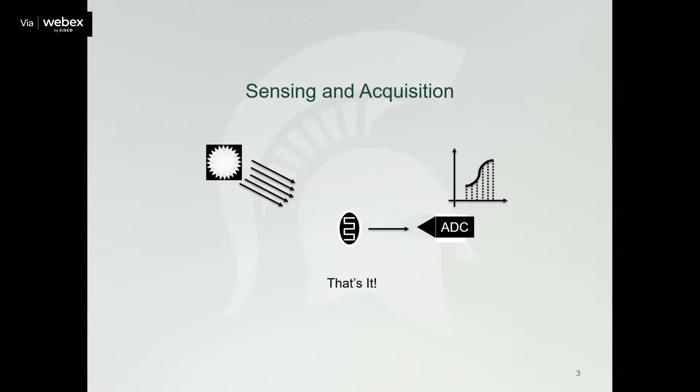This is what we do when we talk about sensing: you have some kind of signal in the form of energy, and you just want to read it. So one simple way of doing it is just using ADC, and you can get the signals. There are a lot of things that can be sensed. Let's expand our problems or the applications. There are so many things out there, for example, gas, smoke, permittivity, radiation, stress, light, pressure, and so on.

So when we talk about sensing problems, and if we want to limit this to NDE, there are a lot of things that can be captured using sensors. And this is a truly multidisciplinary area. We can do the data acquisition using ADC for each of them.

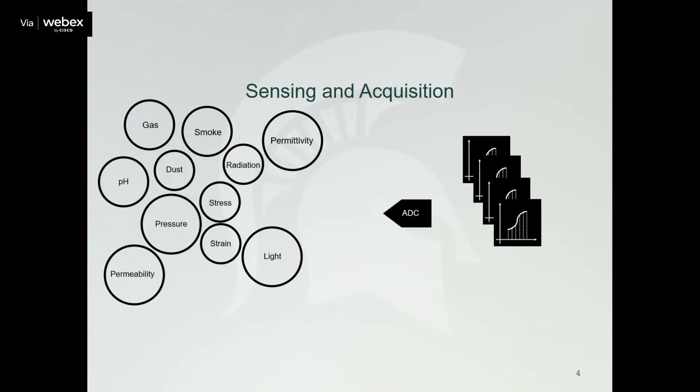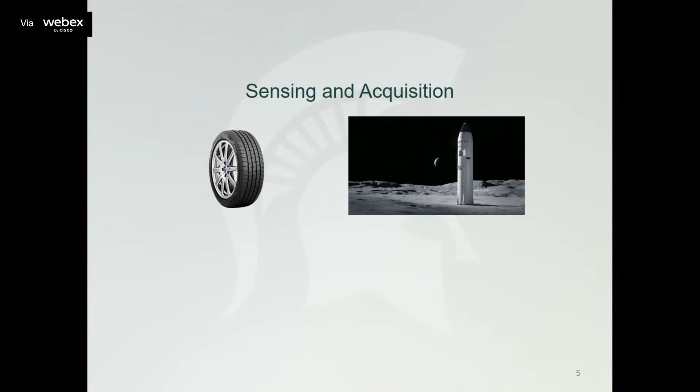So let's look at an example here. Two different applications, right? One is a tire, the second is a spaceship. So what is common between a car tire and a spaceship? Both are pressurized, right? So how can I use a sensor to measure the pressure information? But of course, you have to deal with different conditions when you are doing the pressure measurement for a car tire and a spaceship.

You'll see so many applications for sensing and acquisition out there in the sectors of energy, agriculture, defense, transportation, and so on. In day 3 of this course, with the examples we had in the previous 2 days, hopefully we'll have a rough idea of what applications we can apply our knowledge to after we learn these concepts. And in day 4 and day 5, you'll see examples in agriculture and in energy. Of course, we've talked about examples in defense and transportation.

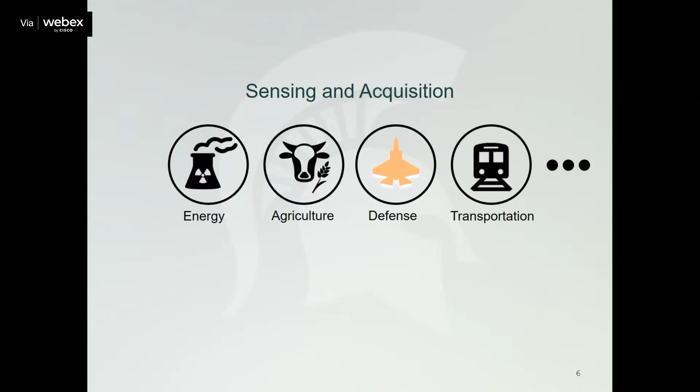So new sensors and acquisition methods are needed for different applications, and I believe I convinced you through the solution approach flowchart when we talked about the impacts of NDE and SHM. And new applications are coming every day.

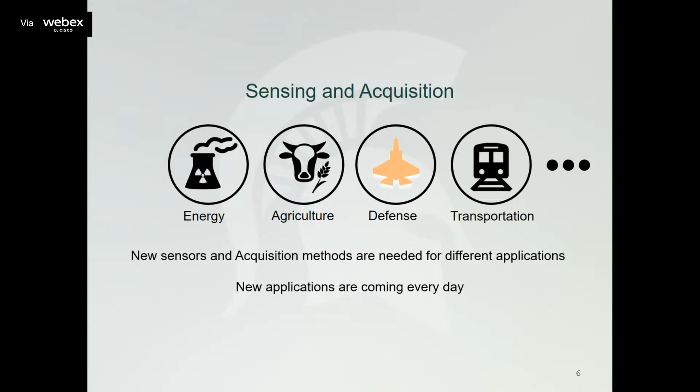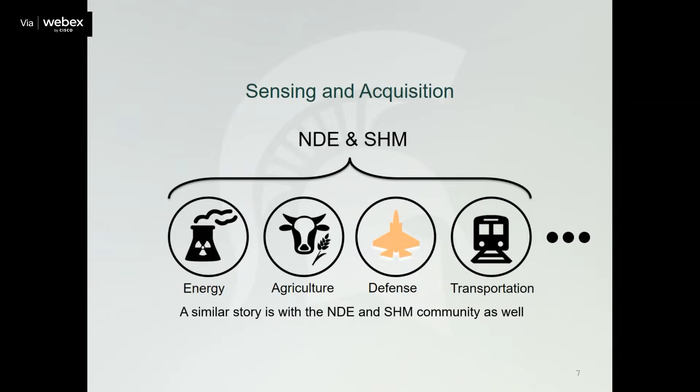Well, I mentioned the differences and the things in common for NDE and SHM, but if you look at it in terms of the sensing acquisition, then you see both concepts or both techniques will apply or fall well into this domain. And you'll see a similar story with the NDE and SHM community as well, although you usually will divide them into two closely related but different communities out there.

In terms of applications, I would like to list three different materials that we're dealing with on a daily basis when we're doing NDE and SHM. But before that, let's have a quick review on the common points and differences for NDE and SHM. I used an analogy at the time, let's say similar to medical devices.

NDE is how we can use those large capital and more expensive localized measurement techniques in hospital, for example, X-ray, CT, MRI, PET, and so on, to give you the exact nature of your disease or what's going on in your human body, versus monitoring techniques, which are usually global, low cost.

And if you look at the way you can collect the data on a much, much larger population, sometimes you call that distributed monitoring or sensing. For example, you can have those handheld, wristband type of devices to monitor your blood pressure, cholesterol level, heartbeat rate, and so on. Well, for industrial applications, for engineering applications, this is very similar.

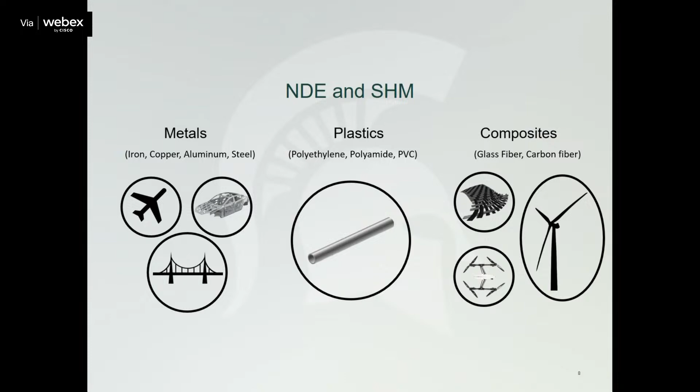And for composites, we've seen the motivation of using composites in the aviation industry. Today, we'll talk about composites used in the automobile industry, and many more areas are using or adopting those lightweight materials. Just to give you a very quick view, and I am sure you will appreciate the numerous applications of those different materials, as I just listed quite a few of them here.

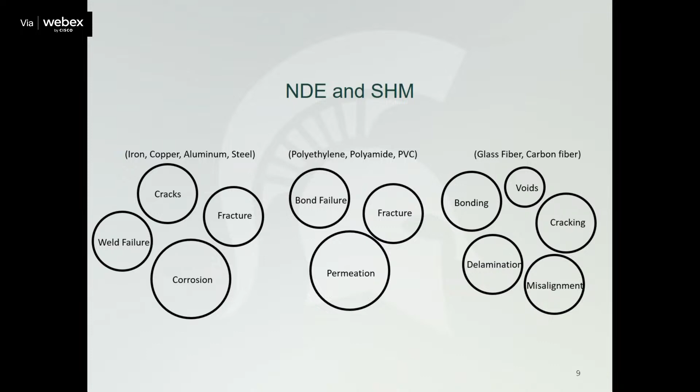Well, for different materials, you can see that I'm interested in different problems. For example, for metals, I am interested in cracking, corrosion, fracture, and for example, the welding between metals and dissimilar metals, and how I can evaluate the failure there.

Well, for plastics, there's a bond failure problem where you fuse plastics together, and there was an interesting project we did for the gas pipeline industry to evaluate the bonding quality of polyethylene.

I don't know if I have time in this lecture to cover that. If I do, I'll be very happy to cover that in our following lectures. If not, I can direct you to some of the readings, although some publications have not been out yet. But this is an interesting problem.

People are realizing that the failure of the plastic joint is not mainly due to the volumetric defects, which are easily detected, for example, using phased array, but you'll see those bonding failures of plastics. Some of them are very difficult to detect using sensing, but it's out there. We call it the cold fusion problem.

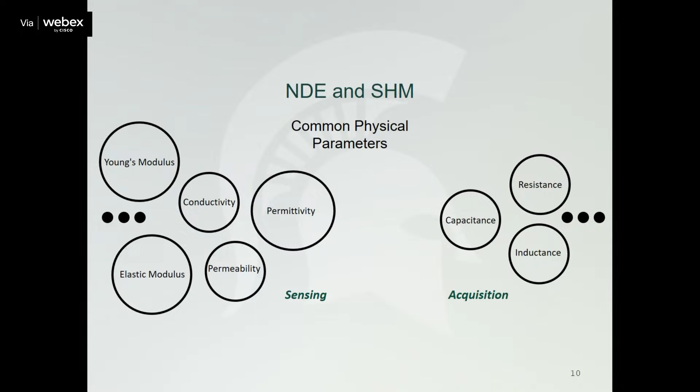Well, when we move this into field operation, sometimes issues will come, and there are still technical gaps. As I pointed out in today's lab session, when I have some technologies, for example, the new EM sensors we developed for CFRP plus steel structures, and we move that into the field, we deal with a lot of uncertainties in the field measurement. So keep that in mind. There are a lot of technical gaps out there, even for those well understood in physics and amazing technologies for NDE problems.

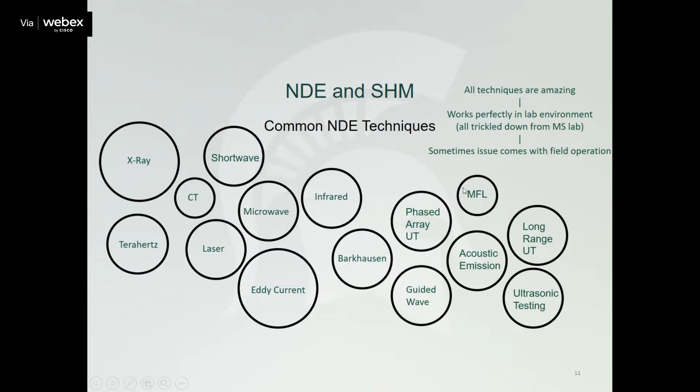So if we want to combine NDE and SHM, we have to fill that gap, because NDE, traditionally, you can work in a lab environment, a factory setting, or a maintenance site setting, in a well-controlled environment. But for SHM, you are doing the same sensing, the same data acquisition, but you have to deal with the field condition. Just imagine those wind farms or those large wind turbine blades out there, rotating 24/7.

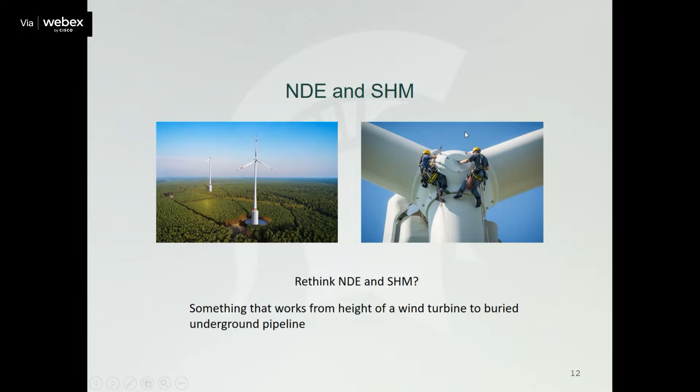Yesterday I talked about this as one arm or one branch to make the next generation of NDE and SHM possible. And for self-diagnosis, we are trying to make it smart in the sensing and data acquisition. So we can achieve, for example, the following scenarios: no wind turbine stop for maintenance check. Is that possible? No excavation for pipeline check, so you don't have to dig things out to do the in-ditch NDE, but you can let the pipe do its job while still checking the condition of the pipe.

No hangar visit for basic routine check of an airplane, so you can let the airplane perform its service. So you can have the in-flight monitoring and evaluation and self-diagnosis. Well, think about those scenarios. We have had some limited success out there. I have to admit that we are doing some great work out there. For example, for wind turbines, we can have health monitoring when it's running.

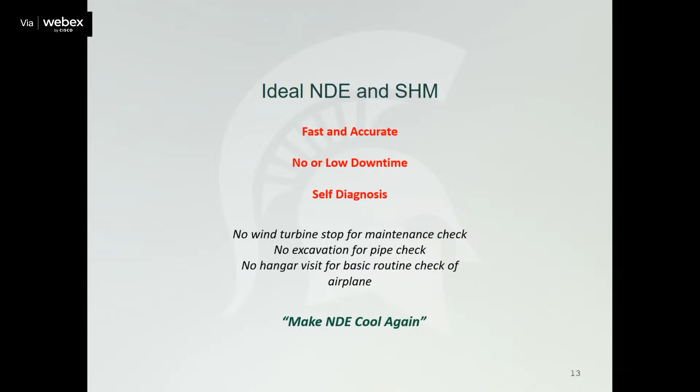And I'm a strong believer in that, not only because I'm a professor in this area, but because if you think about the future, and the future engineering practices, not mentioning the different cool applications I identified in this area, but just like what we're facing in our society's growth, we need to have more materials, new materials applied. We have to have new infrastructure applied, and monitoring, evaluation, testing, certification, and recertification of those new materials and new infrastructures need the next generation NDE.

Okay, so I will stop here, and we can take probably like a 15-second break and think about what we just discussed, and lead to a stage where I want to have both NDE and SHM, and I want to get advantage from both fields, understand the common differences, and apply this to our research problems.

And in this course, since this is the inverse problem, data processing course, we'll choose one. In today's lecture, we're going to choose a couple of applications in the morning and afternoon session and try to understand the concepts we just learned. And we chose guided waves, which is a perfect technique that we can use for both NDE and SHM. All right, so any questions before we move to the details of guided wave NDE and SHM?

All right, very good. So next, 1 hour and 30 minutes. So I will talk about how I can apply guided waves for the application here, which you'll see is a new concept that we can use for manufacturing in the automotive industry.

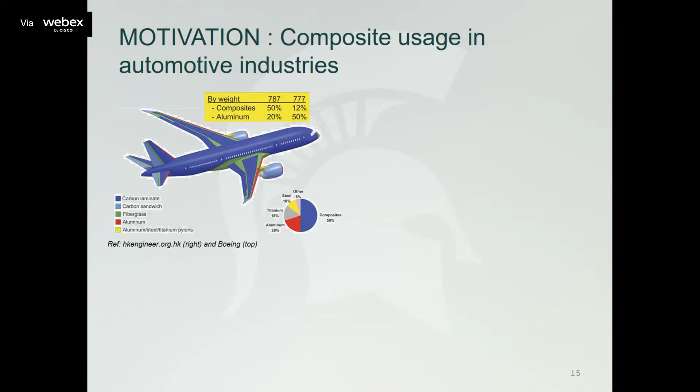Well, the manufacturing aim here is we want to have performance composites. For the aviation industry, we usually have no limit on time and money. Performance and safety are the highest priority. So usually complex, time-consuming, and expensive monitoring solutions can be used in that area. But for the automotive industry, we have time constraints and cost constraints, while safety is also important. I'm not saying that for automotive that's not important, but compared to aviation, that's a different story.

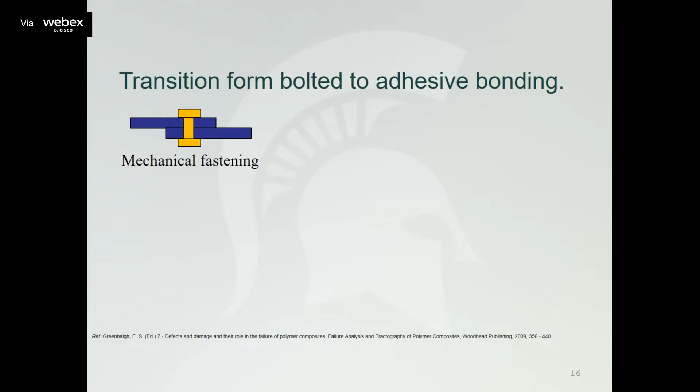Well, the transition from bolted to adhesive bonding: I shared that story to give you some time to think about this transition, that I can use mechanical fastening to join two materials together. Well, for composites, what does it mean? I can drill a hole and join two composite layers together. But if I drill a hole in a CFRP, I am introducing new damage there. I'm breaking the fiber, and that will introduce new integrity deficiencies.

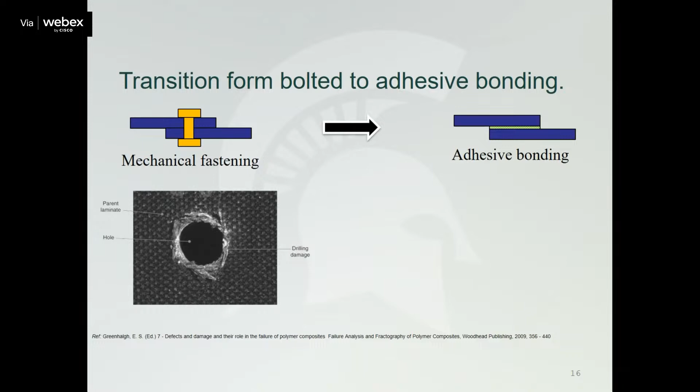Okay, I don't want to do it. Is there a better way of doing it? I can use adhesives, and hopefully the adhesion is good in quality so I can join those two materials together. The advantages of adhesive bonding are that it's lightweight, it's cost effective in fabrication, and there's no stress concentration and delamination like with mechanical fastening. The more rivets or fasteners you add, the more stress concentration you introduce. With adhesive bonding, you don't have that problem.

But what are the disadvantages? Well, we have a new way of doing manufacturing here. We're unable to repair a damaged bond line or substrate when something goes wrong, and unable to disassemble and reuse after the vehicle's end of life using conventional adhesive bonding. And of course, it also brings challenges in evaluating bonding quality with this new way of joining composite materials.

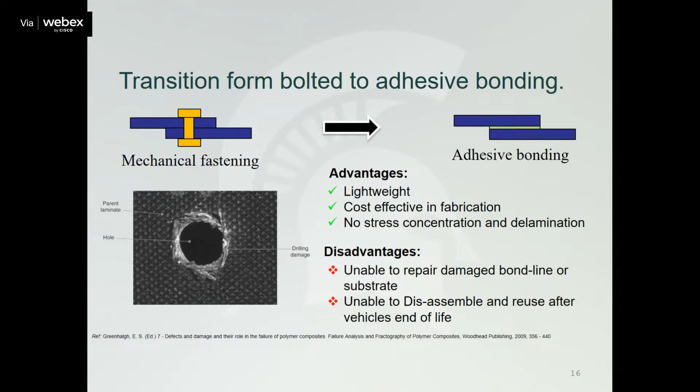So let's talk about a new concept here called reversible adhesive. I can have different ways of doing adhesive bonding, and in terms of the materials, they can be understood in two terms. One is called thermoplastic, the other is called thermoset materials. They have different behaviors when subjected to heating. So for adhesives, you can have thermoset. Thermoset materials cannot be reversed. It's a permanent bond

after you cool down. Well, for thermoplastic, those kinds of adhesives can be reversed by applying heat again. So when it's cooled down and then reheated, you can have this adhesive reversed. We're going to apply this in lab conditions. We can use oven heating and also induction heating to demonstrate this reversible adhesive concept.

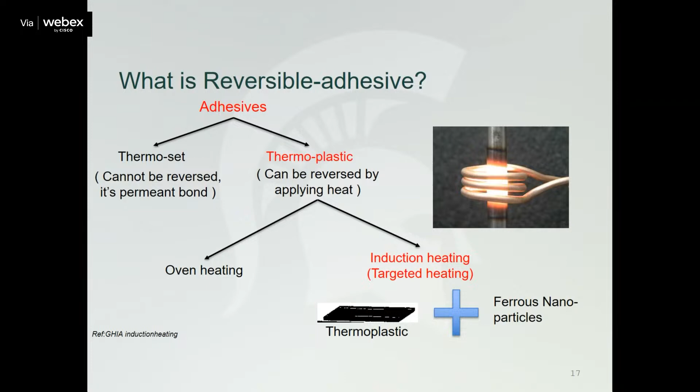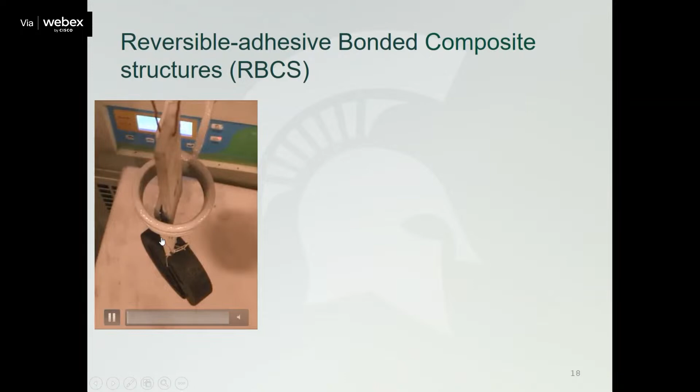Let me just show you a video. This is a video captured in our lab. This is the induction coil there, and there are two composite plates. They just detached. Let me play this again. Right, reversible adhesive to disbond those composite structures. We call this RBCS, reversible adhesives.

There are more advantages here: easy repair and healing of bond line damages. Think about the thermoplastic nature: you can bond it, cure it, have good bonding strength, but you can also repair it by disbonding it. You can have some self-healing characteristic for bond line damages, which I'm going to show very soon. And you have rapid processing and dismantling, and reusability of components at the vehicle end of life by adopting RBCS.

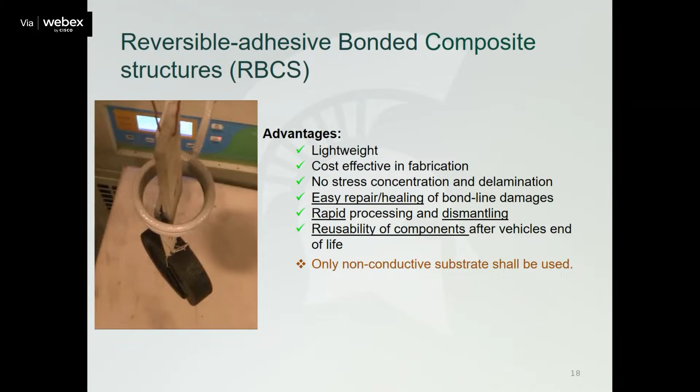Well, the disadvantage is that only non-conductive substrates should be used if you are using this electromagnetic targeted heating, because if it is a conductive substrate, then your substrate will also be heated, right? But more research can be done to do a better job in targeted heating, so the EM energy will be absorbed more in the adhesive layer.

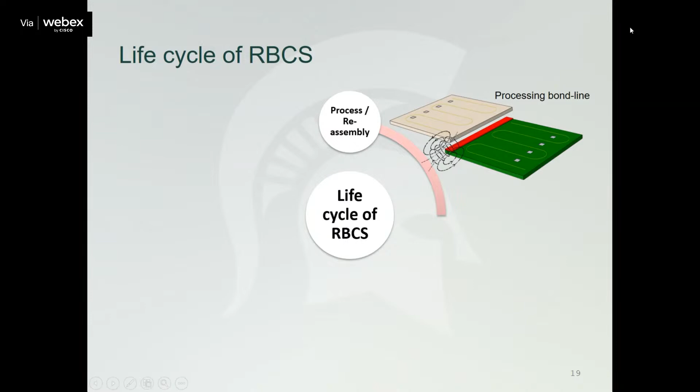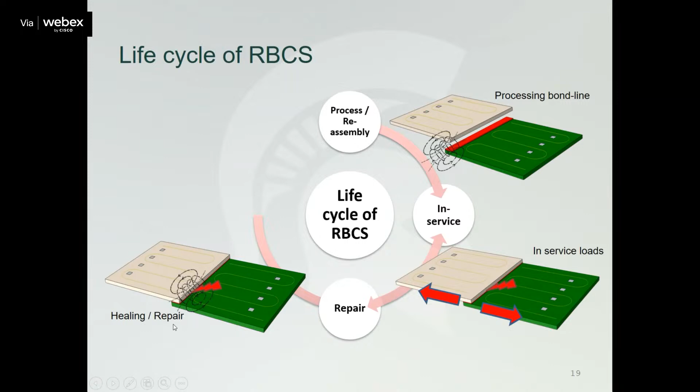So when we talk about the life cycle of RBCS composite structures, there are four major steps. In reassembly, how can the processing and bond line quality be monitored using the technology developed here? In service, with in-service loads, how can I evaluate it? In repair, can I do healing, self-healing and effective repair of the RBCS structure? And in disassembly, can I achieve easy and safe disassembly? And then you can go back to reassembly again.

So this is a very good way of understanding the life cycle of RBCS, and you can see the use and reuse of the materials. At each stage of this life cycle there are technical challenges dealing with bond line quality monitoring, in-service loading, repair, disassembly, then reassembly again. In today's class I'll focus on some of them, not all. We'll talk about advances in monitoring, and also in-service loading monitoring and evaluation. Okay.

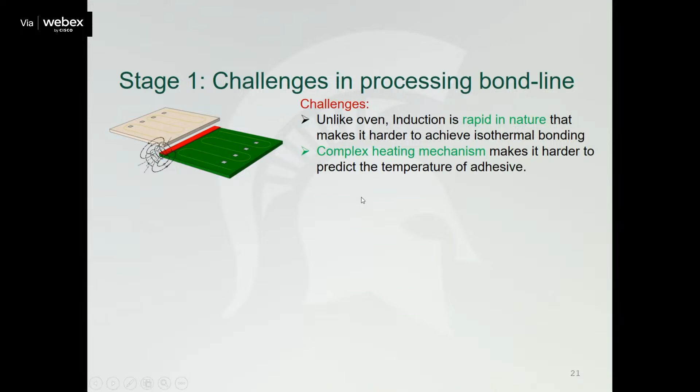Stage 1: challenges in processing the bond line. Unlike an oven, here we have induction heating. Induction is rapid in nature, which makes it harder to achieve isothermal bonding. And complex heating mechanisms make it harder to predict the temperature of the adhesive.

The common defects when we do this heating are chemical degradation of adhesives, and sometimes kissing bonds. So I want real-time temperature and adhesive state monitoring. If we can do that, we can have a well-controlled process, controlling the induction heating system to obtain optimal bonding, working in an optimal heating zone. But how can I do it at the bond line stage?

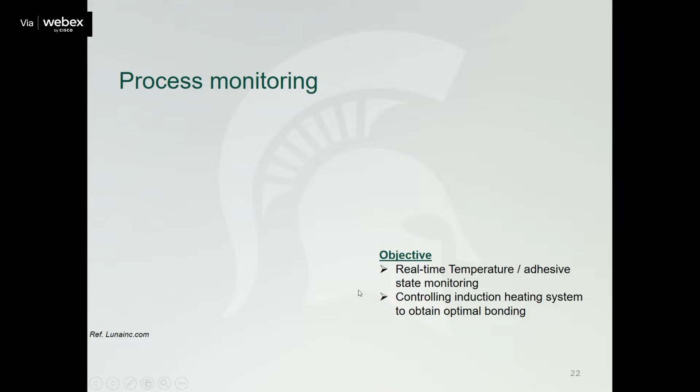So this is a process monitoring problem. The objective, which is listed here, the same objectives here. So one way of doing it is you can use a fiber optic sensor. This is an expensive but very high accuracy and precision system called Luna system, where you have fiber optic to measure inside adhesive for its temperature changes over time.

Well, the temperature of adhesive can be measured instantly and more accurately. But the problem is the fibers act like a flaw when you have those fiber embedded in adhesive. They are just foreign materials, right? And also, they are fragile and expensive. And each sensor here will cost about $500, right? And this is not very economic to do it. But we start from this solution and give us real-time, instantaneous, and accurate monitoring of the temperature there.

Is there a better way to do it? The answer is yes. We can use guided wave sensors. You've seen these guided wave sensors in previous fatigue loading or fatigue cycle loading test, where we try to evaluate the composite materials, where we introduce different kind of fatigues there. And for bonding, we also developed a technique where you can use this GW method to measure what's really going on in the adhesive bonding quality. So we don't have to introduce a foreign material like a fiber into it.

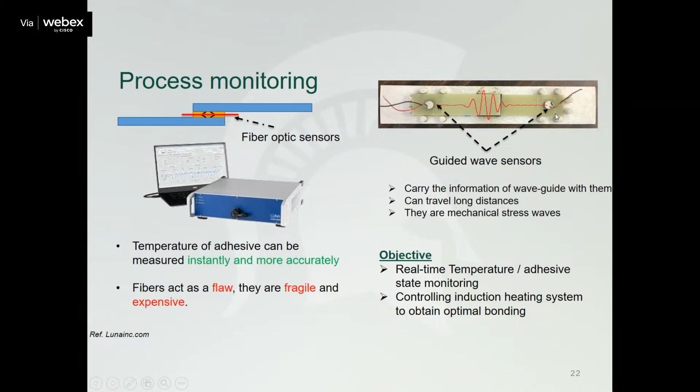So it carries the information of waveguide with them and can travel long distance, and they are mechanical stress waves. And think about the mechanical stress waves propagating one substrate to the other in between the adhesives. And the energy will be transmitted from one transmitter to the other PZT receiver more when you have a better bonding quality.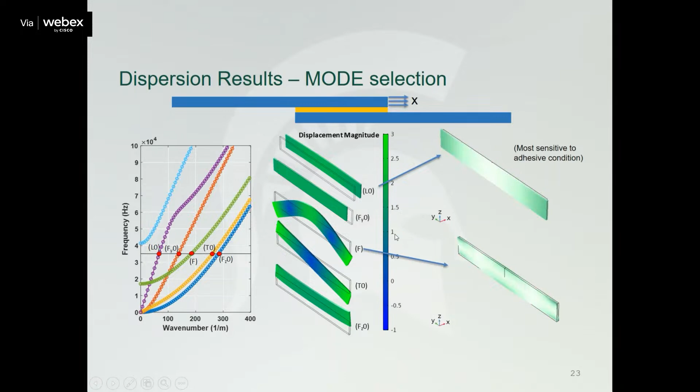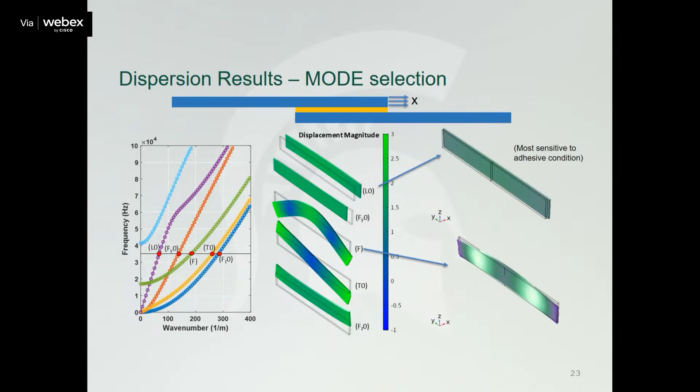So we start from simulation study, so we can have those dispersion curves, the frequency versus wave number, and you can use that to identify the best mode when we have this particular geometry and adhesive between. So you can see that for different modes that you can have, you can find what are the most sensitive modes sensitive to the adhesive condition there. And you can also choose the right frequency when we're dealing with those structure.

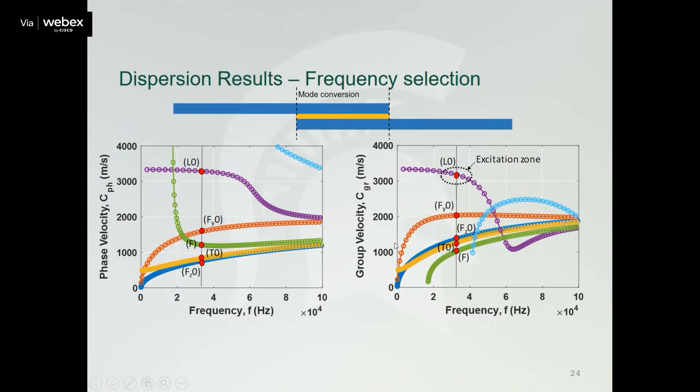So from the dispersion curves, in this case, we're going to have the phase velocity, group velocity versus frequency, and you want to look at one mode that can easily be used for our monitoring, and you identify, in this case, for this particular frequency, that you can see the difference here in group velocity and phase velocity, and you choose that particular frequency around 35 kilohertz in our excitation zone here as our exciting frequency. Well, you also see different mode conversions, as you can see from here when you have this spectral structure.

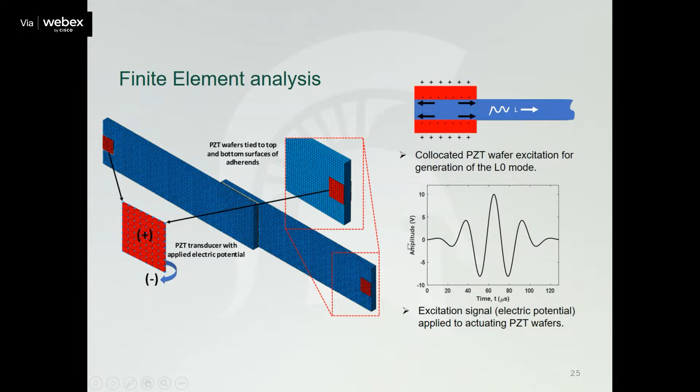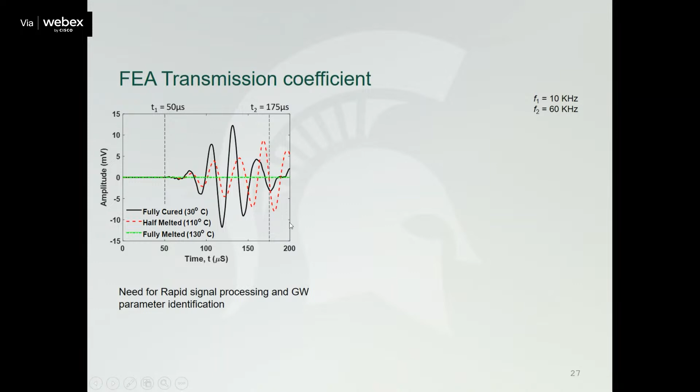So from that, we can calculate the transmission coefficient. These are the simulation study. So you can get the signal amplitude versus the time. Well, this is the simulated PZT response. Remember, you have two PZT applied on each substrate end, and we can measure that. So you can see for fully melted, then this amplitude is 0, right? So no energy has been transmitted. Well, for half melted versus fully cured, then you can clearly see for the fully cured, you'll see the energy or the signal has been captured.

Well, you need rapid signal processing for guided wave parameter identification, so you can have a better understanding of the adhesive quality at different temperature. So there will be signal processing technique out there, and you can extract the parameters for guided waves and then do further data processing and classification. So this is similar to what we learned before in signal conditioning, pre-processing, feature extraction, and classification of different conditions there.

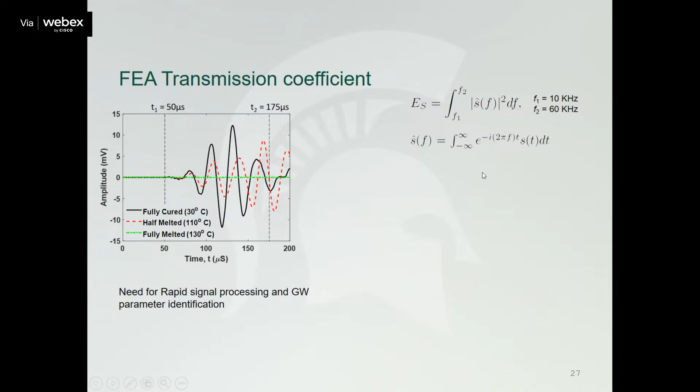So one way of doing it is you can look at, for example, the signal, then you look at the ES, which is taking the Fourier transform of the S squared, well, S is nothing but the Fourier transform, as you can see from here.

And you can calculate the transmission coefficient, the definition we will define here. You take the Fourier transform of the signal in the time domain, then you take the squared frequency component, and integrate that over F1 to F2, the frequency range. Then you can get the transmission coefficient as a ratio of ESN to ES0.

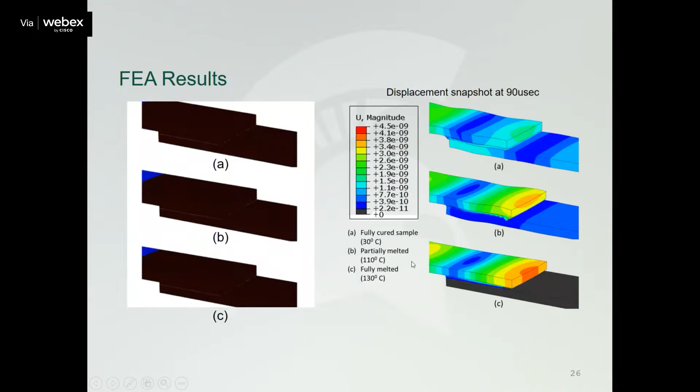And everything here is simulation study. We want to validate this in experiments. Right? This just tells you the correspondence here for 30 degrees, 110 degrees, and 130 degrees.

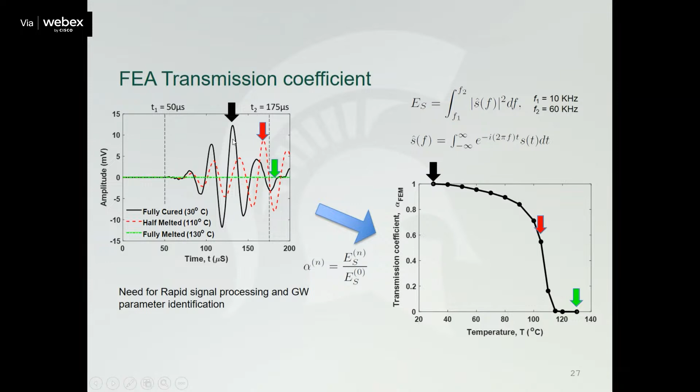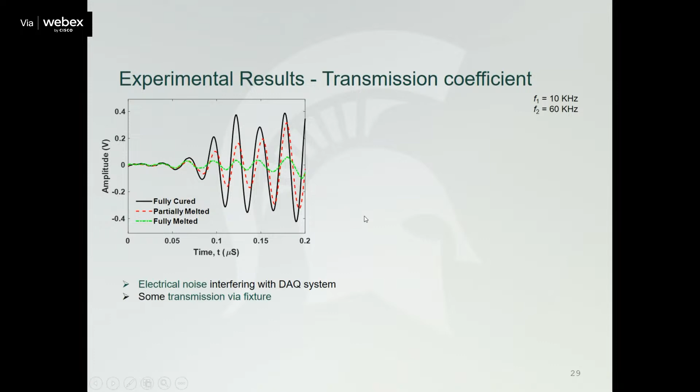This shows the experimental results. Compared to the transmission coefficient in the simulation, we can do the same approach in calculating this transmission coefficient. But one thing you notice in the experiments is that you have electrical noise interfering with the DAQ system, and even when fully melted, you still have some energy transmitted through, right? So this is something you have to deal with in the experiments. In simulation, it's going to be exactly zero.

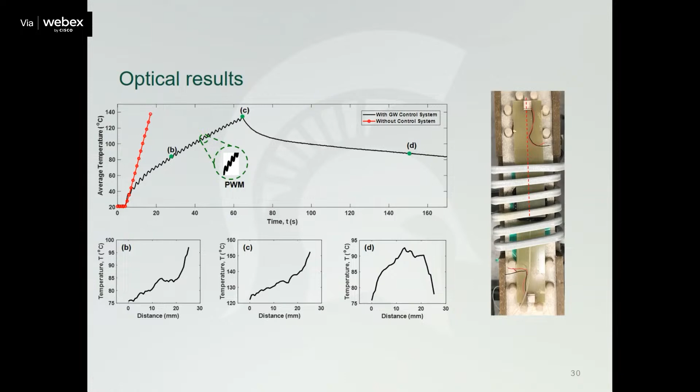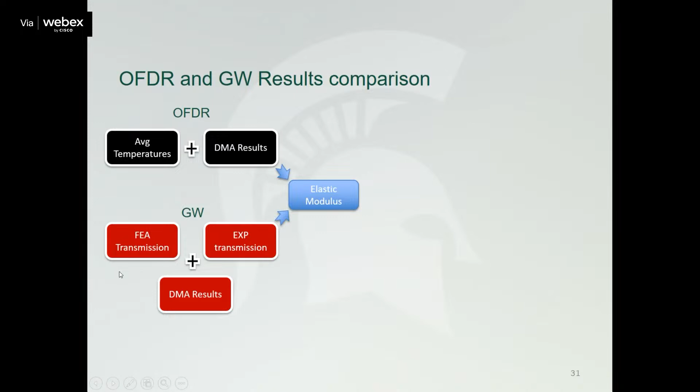So you can compare the OFDR and GW results. You can have the temperature measured from the optical fiber, and you can also have the guided wave. You have both FEA transmission information. You fuse that with experimental transmission data, and you can use that to get the elastic modulus calculated and do the comparison here. You can see for optical and guided wave, it correlates well.

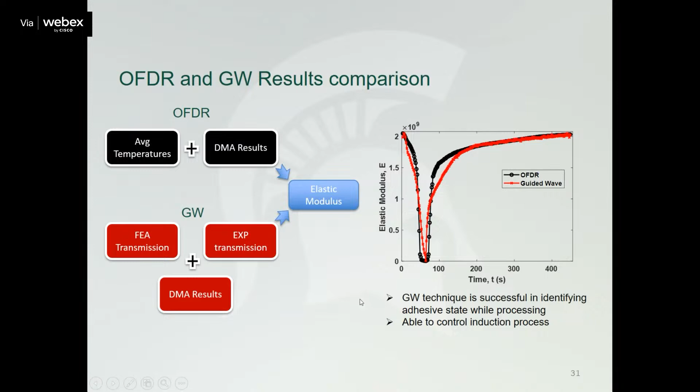And it tells us that guided wave technology is successful in identifying the adhesive state while doing this bond line processing. Right? You can achieve the same thing now. You don't have to embed any sensor in between. You still can have this non-destructive way to measure the temperature and eventually infer the elastic modulus there. And you are able to control the induction process by designing this new controlled target heating method.

There are new ideas that we can apply, and I will just show this to the class. This is an open-ended research question. We are working on that. We haven't fully completed this, and this is actually in our research proposal that was funded recently.

Yiming? Yes. Any issue with recording? Meaning for this? Yeah, it's okay. You can record this. That's fine. Okay.

So this is some idea that we propose, but it's okay that we share with everybody. So we can have long bond line monitoring using an EM sensor. For example, you can have a pancake style induction coil. Instead of having a small structure put inside the induction coil, how about we have a pancake compact induction coil or even a coil array design that's moving along the joint direction.

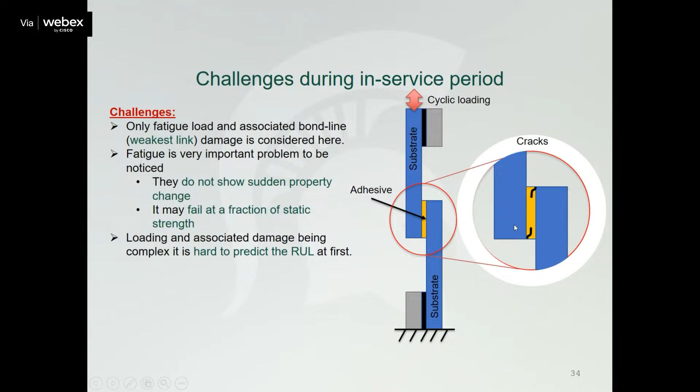So the objective here is, can we have real-time fatigue crack tracking and prediction, or prognosis, with RUL estimation? So yesterday we looked at a problem where we tried to estimate remaining useful life in composites, where we used guided wave and optical transmission techniques. At the time, it was a different problem setting. That's a tensile test where we have a GFRP coupon with a drilled hole in between. But now we're studying the adhesive bonding quality subject to fatigue loading.

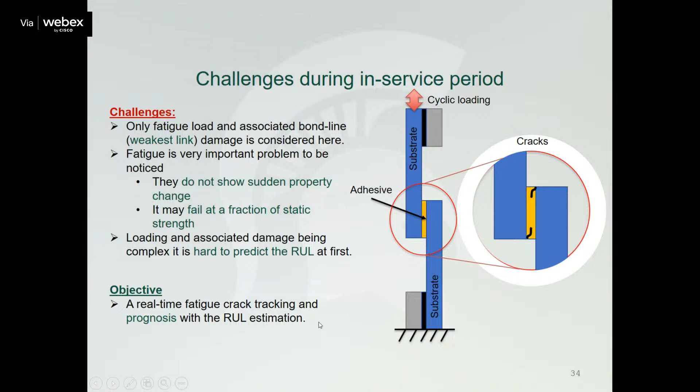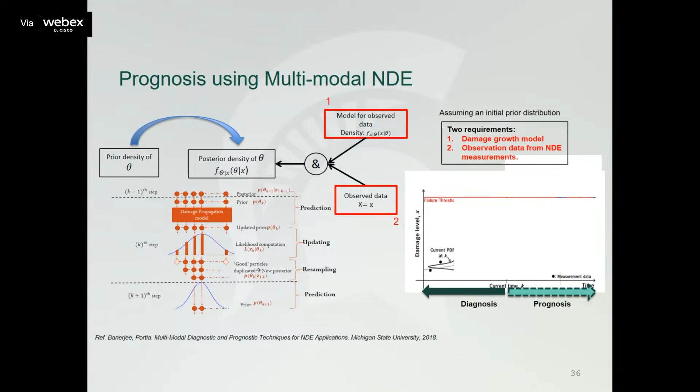Well, you'll see some of the same slides here. I just want to show this to you, just to recall what we covered yesterday, right? Okay, and I don't have to explain this again. The same concepts here, that you use multi-modal NDE and prognosis to understand the damage state, or here the damage level over time.

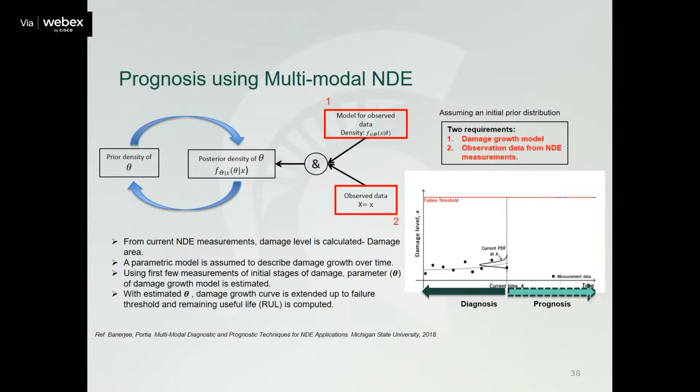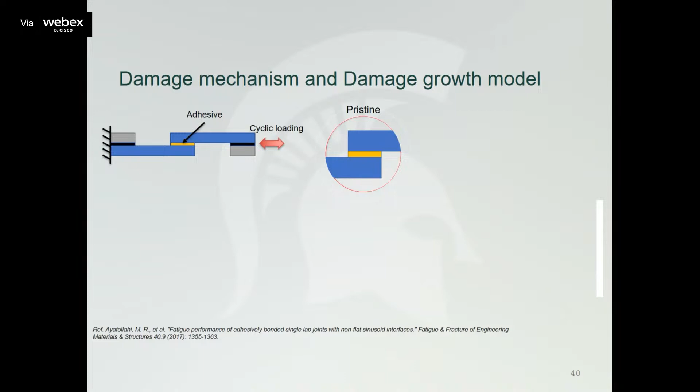Okay, so for this particular problem, when we talk about the damage mechanisms and damage growth model, we start from the pristine state. Subject to cyclic loading, you can have crack initiation. We always want to understand that, so we start from the optical technique. You can actually monitor or assess the fatigue crack propagation, and you start seeing the location of the crack initiation from the edge of this adhesive layer, then it starts growing over time. And you can also measure optically how it grows over time in space. Then it grows from both ends, and at some time it will lead to failure.

So what we introduce here is called an effective area, where you have an effective area to couple the energy from one substrate to the other substrate. The larger this effective area is, the more energy will be coupled. And this can be correlated with our guided wave signal parameters. So from a top view, you can convert this into a 2D effective area. So if my measurement can be found to be correlated with this effective area, then I have a way to describe the damage and its growth using my NDE technique.

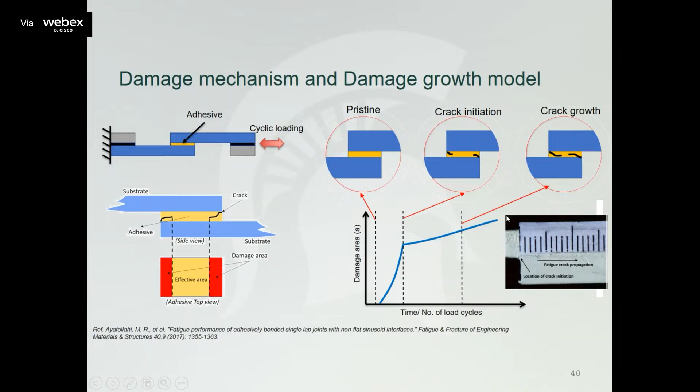Well, we adopt the same damage model. Remember the Paris model we had before? In this case, you'll see it also follows a similar pattern. And for the adhesion region here, it will grow at a different rate for region number 1 and region number 2. Here we call this crack initiation. Before that, you'll have a different damage area change rate. Then you'll have a second region followed for the crack growth range.

So same concept, so I don't have to explain this again. So we select this example so we can visit this problem again. But the key takeaway here is we have this new model, we have the parameters to be estimated. Here is the M1, C1, M2, C2, and T star or N star is the transition or jump time here.

I hope you still remember the M1, C1, M2, C2, where we use this Paris model, where C is a coefficient, M is a power. So basically, we are using the C delta K to the power M model here. So we can study the change of effective area or damage over time or over cycles.

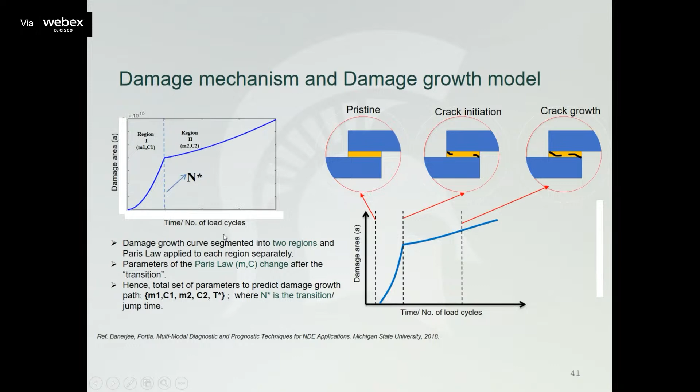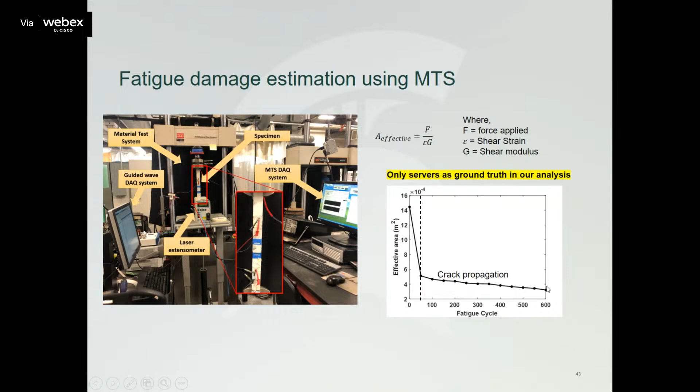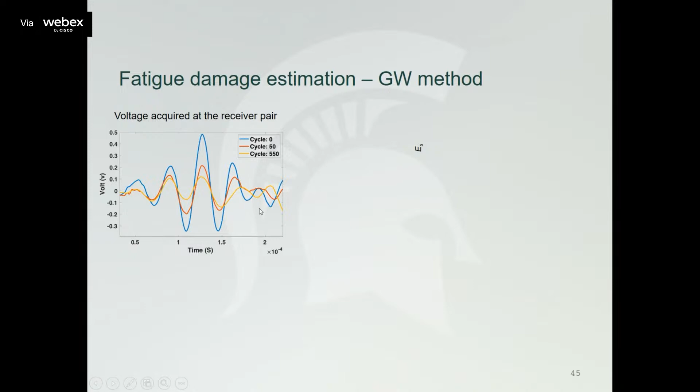Well, you'll get this measured at different cycles. And you can see at different cycles of fatigue loading that the voltage acquired at the receiver pair, which is also associated with the energy being transmitted from one substrate to the other, is changing over cycles. And this definitely makes sense, right? When you have 0 cycles compared to 550 cycles here, 0 is a pristine stage, 550 you have some defects there. So definitely you're going to have a reduced voltage measured at the receiver PZT sensor.

Okay, you did a similar transmission coefficient study, and you calculate the transmission coefficient here. This is different from what we did in the previous application. We call this the transmission coefficient, ES here. It's proportional to what we had before for alpha, but anyway, with ES versus fatigue cycle, you can see the transmitted energy over fatigue cycles.

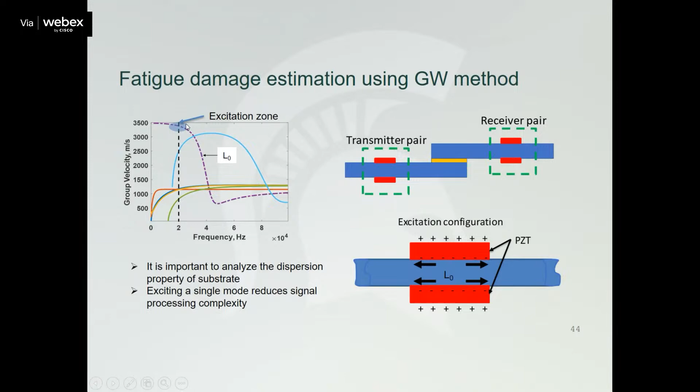And F1, F2 are the lower and upper frequencies selected for analysis. In this case, since we chose 20 kilohertz, we chose 15 to 25 kilohertz. So you can calculate that transmission coefficient within that frequency range. Hopefully I explained in signal processing why I chose those upper and lower limits, because for different problems, you're going to choose your excitation zone from this particular dispersion curve. In the previous example, a different problem, we chose 10 to 60 kilohertz, right? So I hope you can recall that.

And from this guided wave measurement, you can actually capture these two regions, the initiation and propagation, or initiation and growth region, with the defect area measured from MTS. Well, for guided wave, you can capture how this defect effective area grows over time, and the remaining useful life can definitely be estimated. And I don't know if you noticed that or not. Our estimated remaining useful life is always an underestimation.

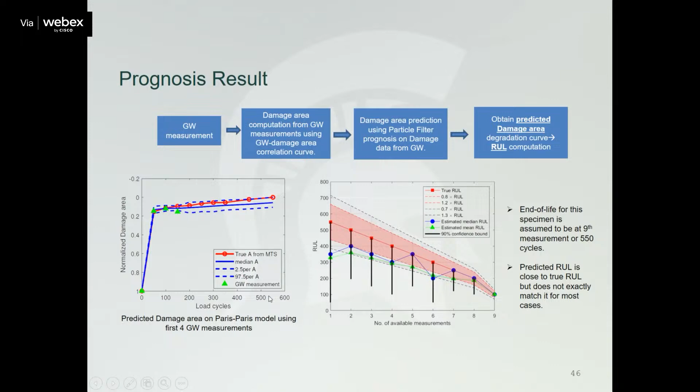So currently, the stage transition is manually fed to the prognosis algorithm for this particular problem, because it's not easy to obtain. So this is one limitation. The measurement interval needs to be smaller, and experimental errors need to be eliminated, right? So this is ongoing work.

And the modal analysis helps identify ideal excitation conditions at different stages of fatigue damage, and explore the behavior of guided wave modes at each stage. This will help us to identify stage transition from guided wave data. So there are some ideas that you can use by combining the modal analysis, FE analysis, with our prognosis algorithms, which can help us to better understand the damage growth monitored by guided wave excitation.

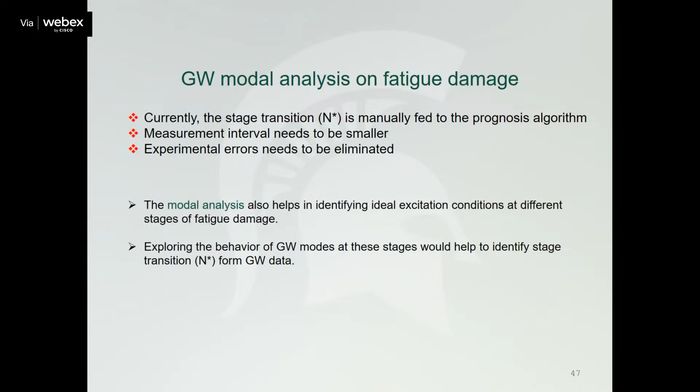So the next two parts, as I said, due to time, we won't go into the details, but these are the other two stages of the life cycle of RBCS. Well, there are some ideas here which I definitely want to present. For example, the repair or healing of adhesive is similar to bond line processing. In bond line processing, you can change the temperature, so you can see the change of energy transmission from guided wave measurement, or from the adhesive property, you can measure the elastic modulus change over time or over temperature.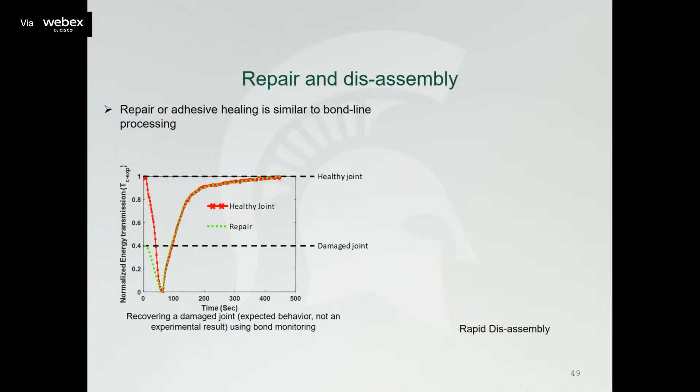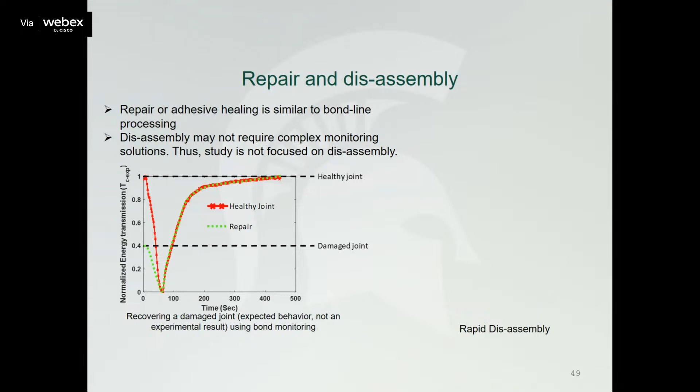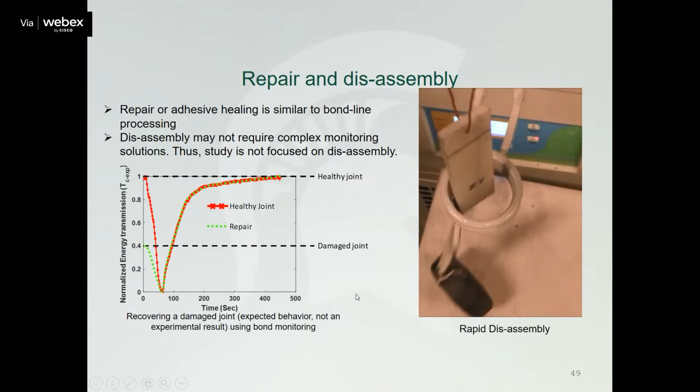So dis-assembly may not require complex monitoring solutions. So study is not focused on dis-assembly most of the time. But we just showed you this video before. This is a rapid dis-assembly problem. Okay.

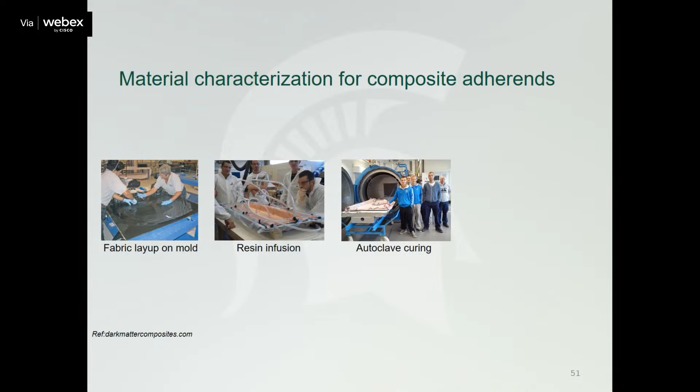So I have a couple of slides that I want to show you very quickly, but I will not spend too much time explaining this in the lecture. I just want to expose this to you so you can understand how we can do, for example, manufacturing for composite adherends, for example, fabric layup on mold, resin infusion, autoclave curing, and so on. The challenges are it requires skilled labor, and a lot of uncertainties on final product quality. And you'll see a lot of common defects there.

For example, missing ply, wrong ply orientation, porosity, residual stress, improper cure, contamination, and so on. So one idea is, if we can have a smart skin to achieve robust, rapid, and quick material characterization, how can we do it?

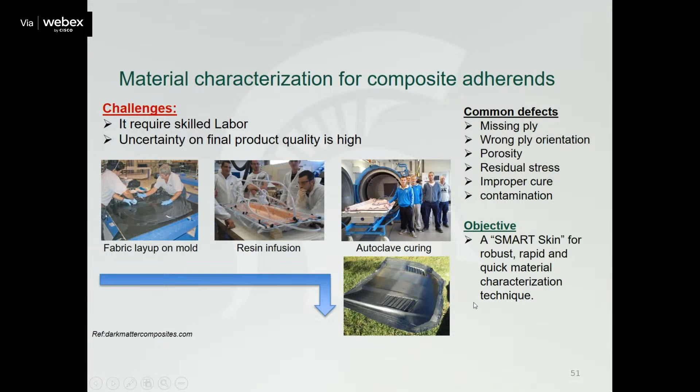So this is a patent-pending method we have here at MSU called Smart Skin, where you don't need to permanently bond the sensors on the components. It's more like a skin that you can move around, just like a carpet, on the structure, and you can take the measurement. And the sensors can be reused multiple times and offer the flexibility of deploying sensors in any array configuration.

And because it's a skin type of flexible structure, it can be attached to most curved and non-curved structure surfaces. And the transducers are fixed, so the distances are the same. Then you have a very easy velocity calculation. This leads to a much simpler signal processing technique when we're dealing with this smart skin

type of sensing array. So the idea is you can make this flexible in a way that you take all those sensing measurements simultaneously from the sensor network, while you still have some fixed distances there to make your signal processing easier. Okay, so I will just show this very quickly. We've done this in the lab, and we can use that to estimate the material properties, for example, modulus, Poisson ratio, density, plate geometry, using sophisticated signal processing.

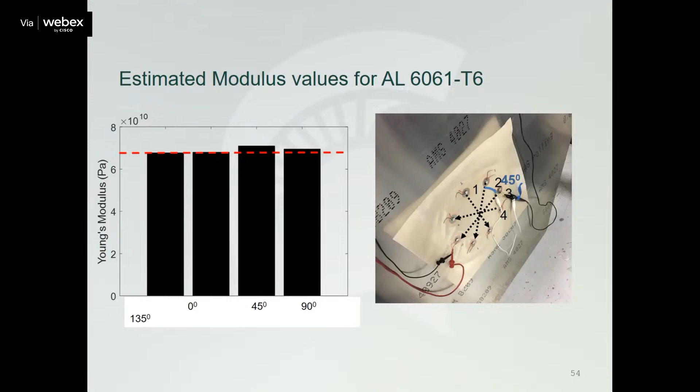Machine learning can also be applied here, so you can improve that, using numerical simulation to generate a lot of data, and also using the smart skin to capture the real data, and using guided waves plus machine learning techniques, you can have a rapid material characterization. Of course, you have to train the model well and use that to get the material characterization done, assisted by AI.

So for one paper, you can refer to our 2020 publication with one of my graduate students, where you can use ultrasonic guided waves based identification of elastic properties based on a 1D CNN architecture. So this is an interesting paper. If you're interested, you can read it.

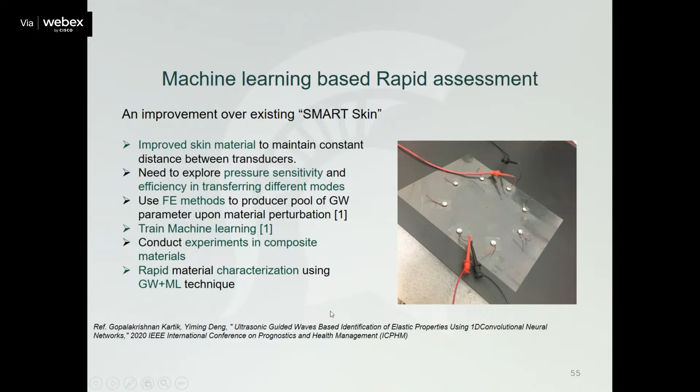Okay. So for the last 15 minutes, there are some special topics of interest, and I want to show these to you instead of lecturing and going into the details. I just want to show you some ideas, hopefully to make you motivated and excited and think about future research directions. For example, embedded sensing, how we can embed sensors into the composites.

And so each layer is going to have its own thermal signature, right? So this brings you a unique signature based on the unique wire pattern orientation at each layer. And you can heat those conductive wires by Joule heating and capture that thermal signature using a thermal camera. What does this offer you?

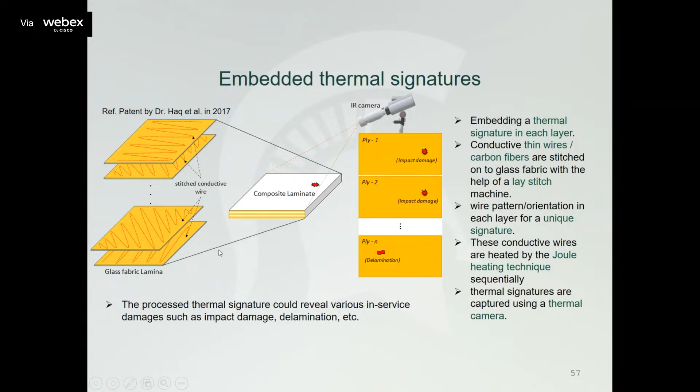In order to do a better inverse problem, in order to do a better signal processing, can we make our life easier at the beginning? Think about that. And this is a perfect example that we can have embedded thermal signature in the components that will make our data analysis simpler at the end. Hope that makes sense. You can also have, for example, embedded active structural fiber idea being better explained here.

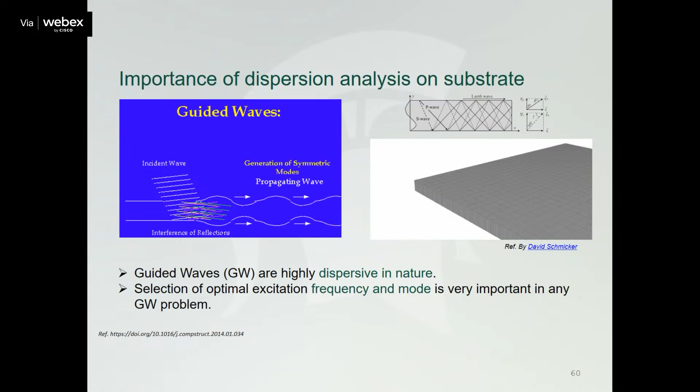For the future recommendations, or maybe I will not call these recommendations, but some future thoughts or research directions you can think of as students of this course. I hope you can have more ideas resonating, more thoughts coming out from this, and you're very welcome to talk to me or interact with the researchers in this field. Well, these slides I will just leave to you. They are self-explanatory. When I distribute the slides, you can have them. So I will just skip this quickly. It's not my intention to go over this this morning.

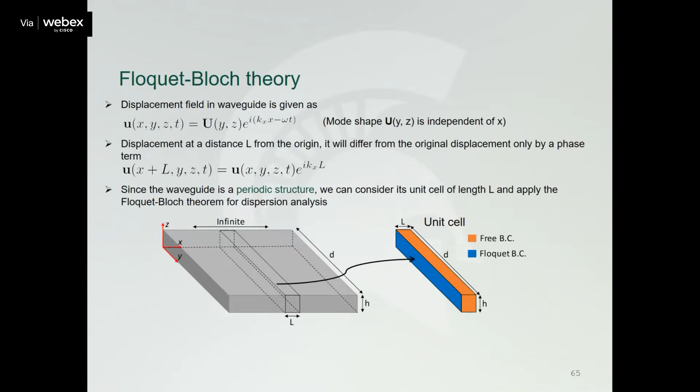And I think I'm a few minutes before the class ends, right? So

In the afternoon, we'll continue the discussion using guided waves, but we'll shift gears a little bit. In the morning we used guided waves to do monitoring, NDE and signal processing. In the afternoon, we'll use the same technology, but for a different application. But still, this is composites. So we have a concentrated topic each day. We will see how we can use this method to do imaging, inverse problems. Here I'm going to talk about baseline-free time reversal imaging. Baseline-free means that you don't really need baseline information. This gives you a lot more flexibility when you do the data inversion to form the images using the time reversal technique. So this is just a quick preview for your afternoon.